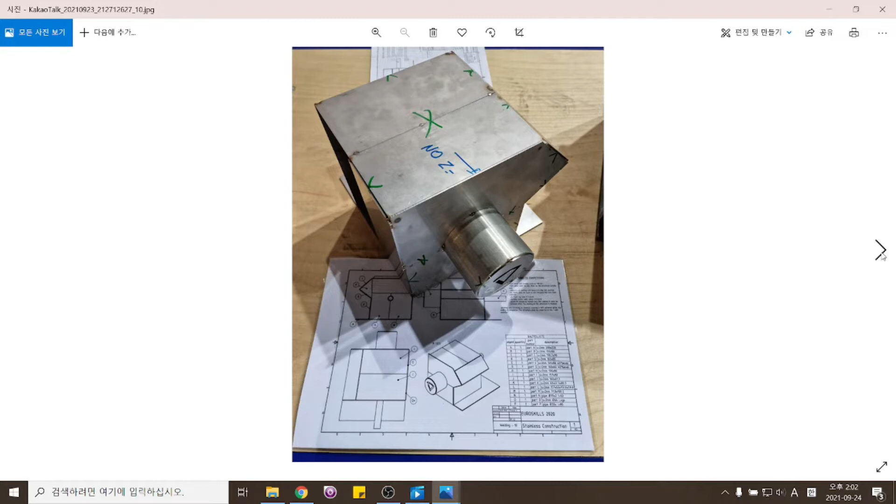This is the stainless and aluminum project we'll cover next time on October 15th. And this is the stainless and aluminum project that we will be covering on the 15th of October.

I don't know who made this problem, but it's extremely difficult and tricky. You can see that it's pretty difficult and tricky. There were two postures with 16T and 10T plates revealed.

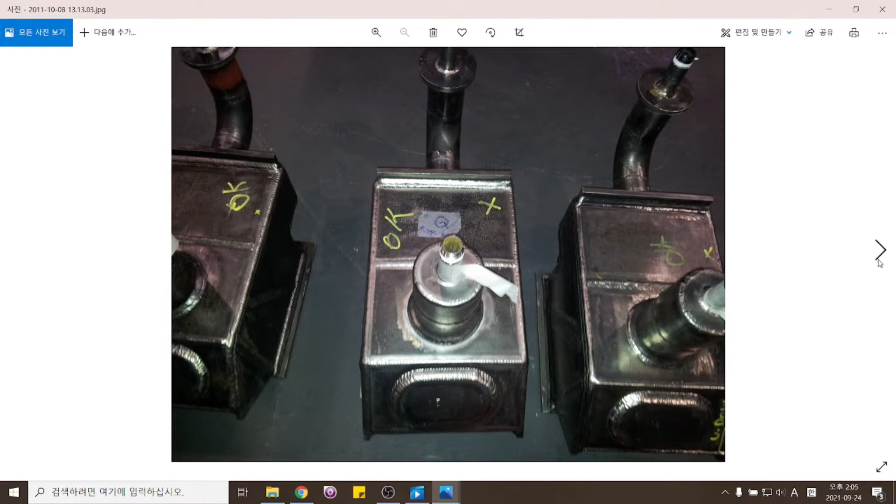Preparation of base material weld joints. Prior to checking the structure of the pressure vessel, review the provided drawing. One moment, please. Two drawings, one for the material list and another for the diagram.

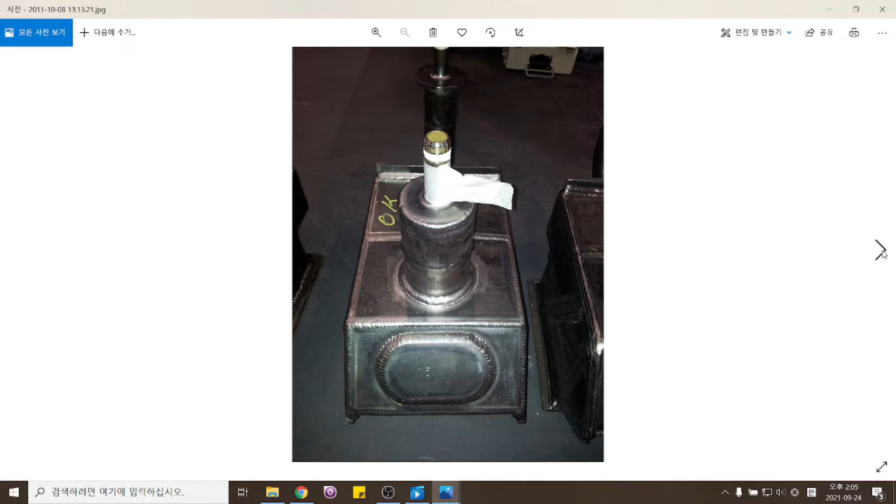You can see flux-cored welding and GMAW used here, several different methods. You can see that several methods of welding were adopted in this project, such as GMAW and flux.

After this session, everyone watching this broadcast needs to reach this level. Most of you watching this video are required to weld this well, as you can see in the picture.

This one is from competitor number 15, it says 15 here. Oh, so I believe that this is from competitor number 15.

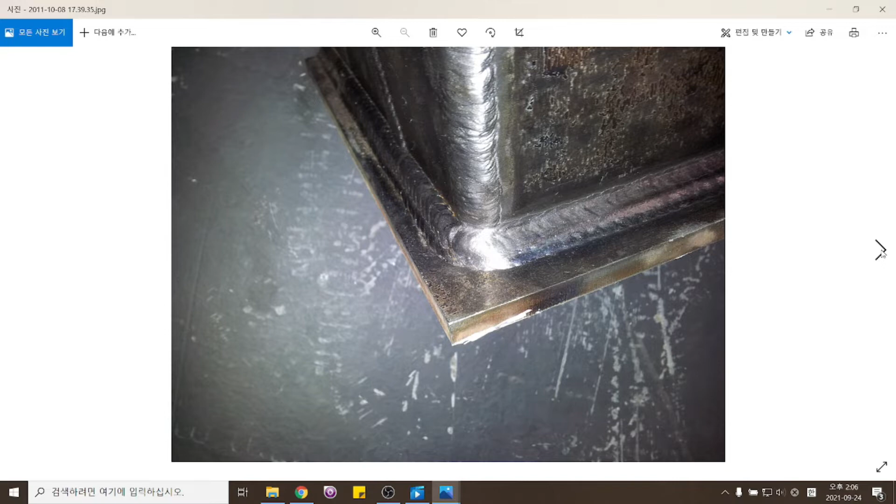When you take a partial picture like this, you can see the beads much more thoroughly. Here you can see the part where it meets the bead, the bead starting point, it's covered very smoothly. You can also see that the start point was covered by the beads very properly.

This is right after the fill pass is done. In the second session, when we discussed the plate coupon, I referred to a line called the lifeline. In this pressure vessel too, you need to keep this lifeline. This line you're seeing on the cursor is also called the lifeline, and you must keep the beads within the lifeline.

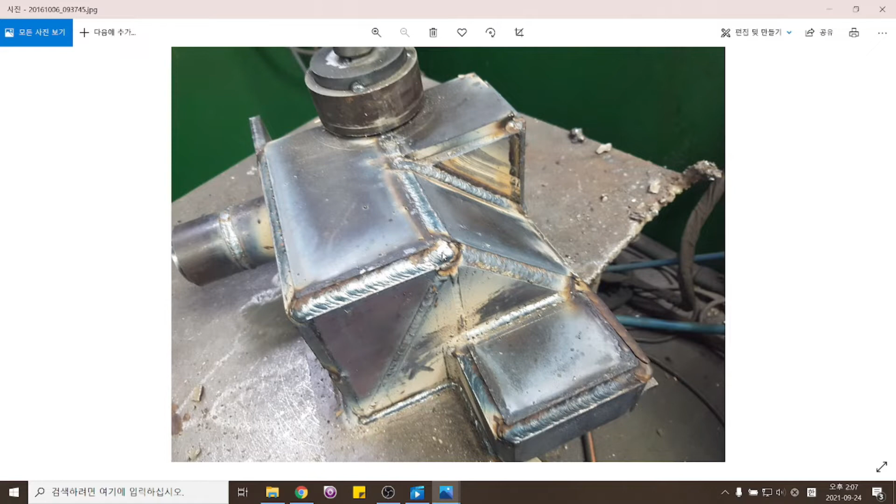You need to keep these lines so that later when you do the cap pass, you can make the beads even. Make sure that you have an even line so that after you are done with cap pass, the beads will be more beautiful. The fill pass has not exceeded the edge of this corner at all, as you can see.

This is the vessel right after every welding is done, including the cap pass. You can see that it's pretty beautiful. Magnificent.

If you take pictures from time to time after working on the fill pass, you can see where the reference point is, where the control line is drawn, and this corner area follows this edge line as the standard. You can understand exactly where to address the control line.

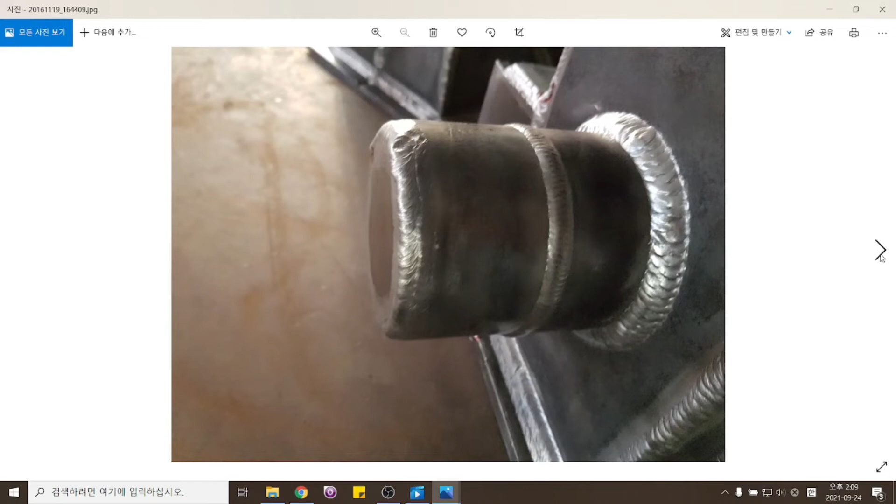This is pipe welding using GMAW, TIG welding, GTAW, and here arc welding, SMAW. So this is basically pipe welding. You can see SMAW, GTAW, TIG, and GMAW.

Pipe welding, when done well, looks very smooth because of the curvature, but if not done well, it looks very unpleasant. When it comes to pipe welding, the skill depends a lot. The appearance of the weldment depends a lot on the skills, because if you do it properly, as you can see in the picture, it'll be beautiful. If you don't do it well, then you will not have a good result.

The difficulty level of pipe welding is quite high. Pipe welding is one of the trickiest welding types.

This is also probably from Euroskills. I believe that this is also from the Euroskills. This shows the tack welding done.

As you'll see in this video, first you receive the materials, check the material list, and check the material dimensions. After you receive all the materials, make sure that all of the materials are in correct order, correct form, and correct dimensions. You also need to read and understand the diagram.

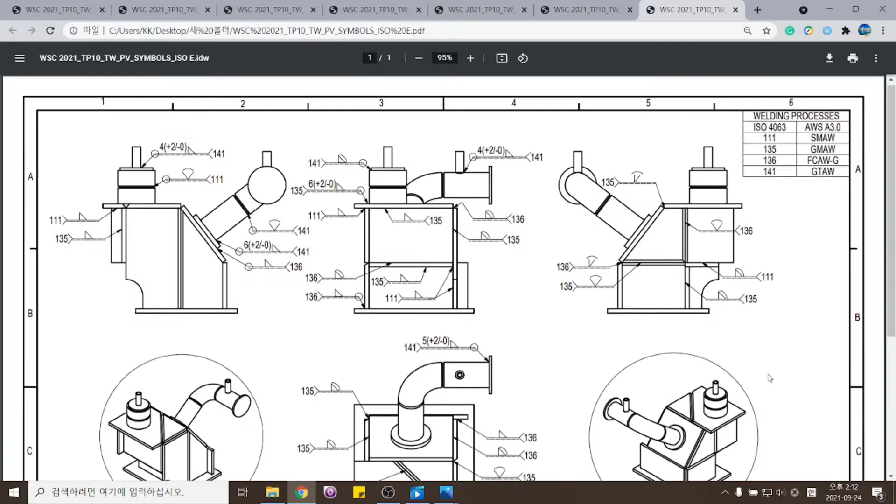So before watching the video, I think it would be good to first look at the 2021 test project diagram. Before we watch the video, let's take a look at the 2021 revealed TP.

Now if you look at the pressure vessel disclosure diagram, you can see in the diagram that there are several diagrams, but first and foremost you must look at the required material list diagram. The materials are cut out and each material has a name attached to it.

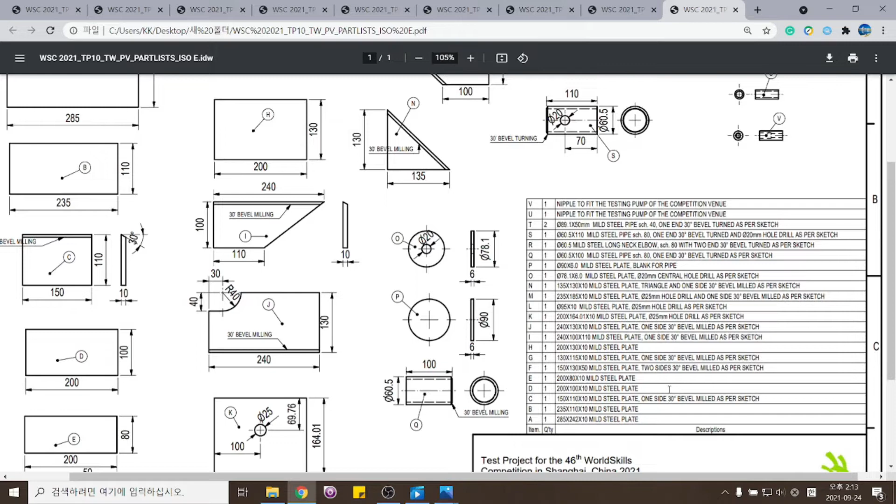So when you are training, you need to look at this material list and prepare your materials accordingly. Make sure that you have all the materials in the correct form. After that's done, you need to look at this diagram.

After you're done with that, please refer to this diagram. Looking at this diagram, the cover size is given in millimeters, the base plate size, where the pipe attaches, all dimensions are precisely shown. You can see all of the proper dimensions, such as where the pipe goes, where the plate comes out.

Looking at this, you can now proceed with the tack weld. This is the diagram that you will be referring to when you're working on the tack weld.

After the tack weld is done, you receive a tack weld inspection and a stamp, and then you need to look at this diagram. Here you can see 111 is SMAW, 135 is GMAW, 136 is FCAW, and 141 is GTAW. You can see on the top right hand side of the diagram the details in the chart.

Looking at the plan view, front view, and side view, it means to weld using 141 GTAW with a leg length of 4 and a tolerance of plus 2mm minus zero. You can see the acceptance and the tolerance in the diagram as well, such as how to weld, what to weld, and how long you should weld.

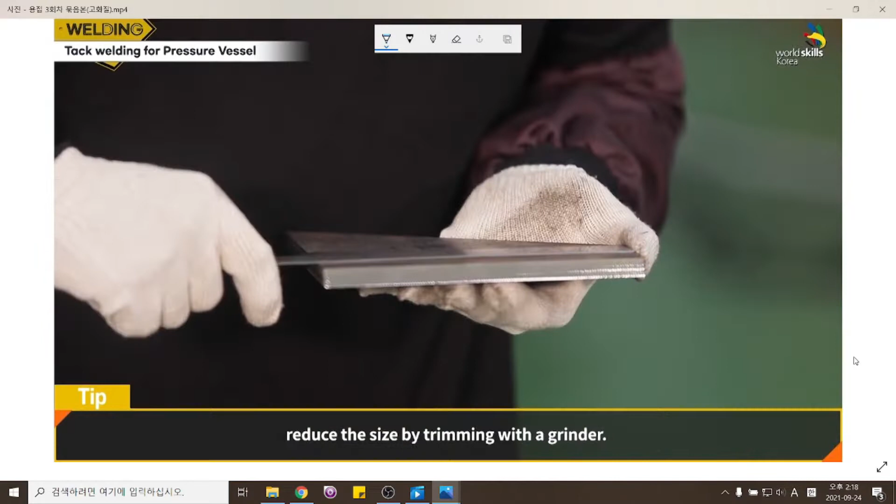After confirming the size, mark the assembly location on the pressure vessel where it belongs. A paint marker might be used for marking on the material, but it is recommended to use chalk to remove it easily.

Check the number of missing materials by marking the list symbol on the material drawing. After counting the number of parts, mark the details on the parts and the location where it should be by cross-checking with the drawing, and whether removal of the oxide layer is required.

Make sure to measure the size of pipe with vernier calipers. The thickness of pipes should be measured as well.

It is not allowed to replace the parts once tack welding starts. Prior to tack welding, check the material carefully, and if there is any material with incorrect size, ask for a new part.

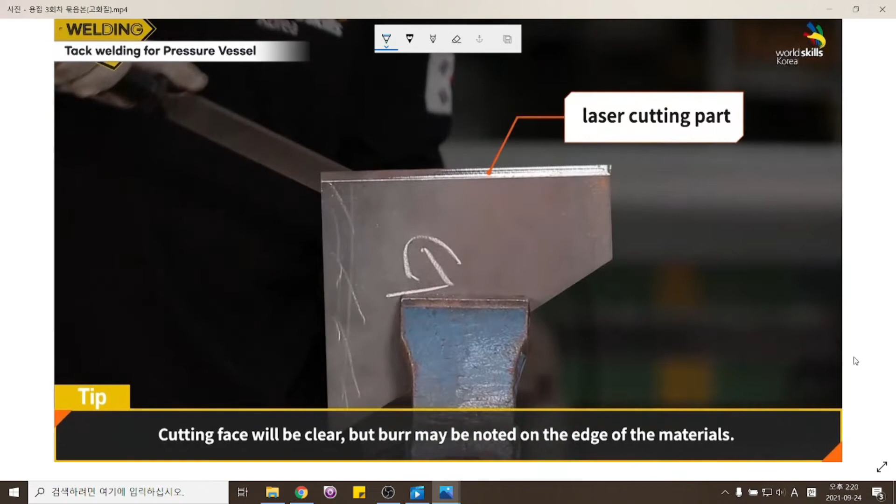After verifying the material list, remove burrs completely remaining on the edge of the material. Most of the material provided for the competition will be laser cut. Cutting face will be clear, but burr may be noted on the edge of the materials. If the residual burr is not removed, it may cause misalignment while tack welding.

Fix the material with a horizontal vise and remove the burr on the side of the plate with a file. After removal of burr, bring the material and return to the welding booth.

The workflow up to now is preparation scope and not considered as the task time duration. But pay attention carefully, more than any other process, since this is the process to check whether materials have been provided inaccurately.

Tack welding for pressure vessel. Welding process used by welder. Recommended using FCAW process for fast working and better weldability.

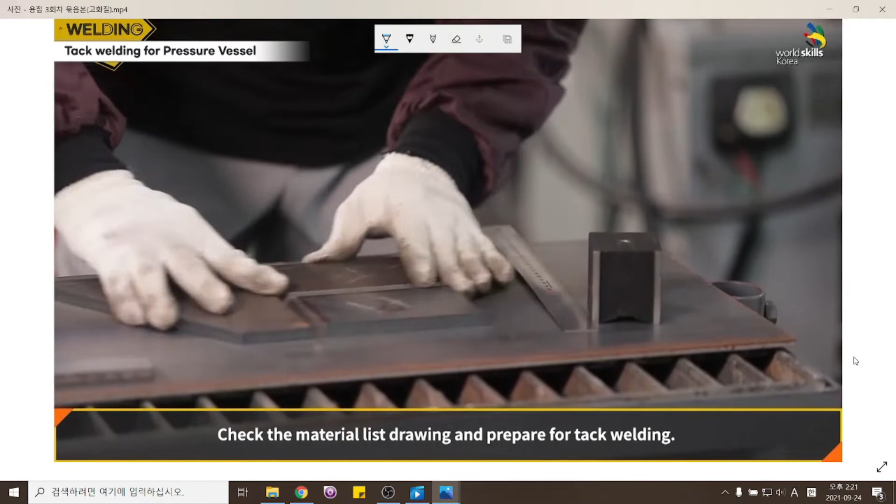For tack welding, welding tools such as steel ruler, magnetic base, hammer, and square gauge are required. Check the material list drawing and prepare for tack welding. 3 base materials will be used for the side section.

Adjust the misalignment of plates with a steel ruler and fix the plates with a magnetic base. Tack weld will be made after assembly of 2 plates, not 3 plates.

When trying to make many tack welds for many parts at one time, it will cause misalignment. Make 1 spot tack welding and continue tack welding, checking the misalignment with a steel ruler.

While tack welding, shrinkage occurs at the tack point. Remained shrinkage will cause misalignment or defects on the completed task. Flatten the shrinkage area with a hammer.

Attach the 3rd plate to use for the side section at the tacked 2 plates. When the surface of the tacked plates is not even, there may be a misalignment when placing the 3rd plate together.

Check the alignment with a steel ruler securely and fix plates with a magnetic base. For butt joint, put the plates on the table and adjust the misalignment with a magnetic base and make a tack weld.

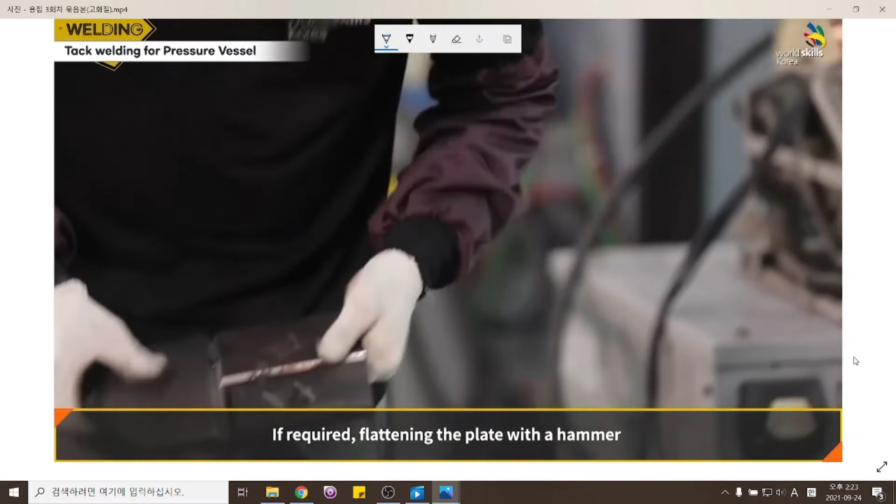Mark the location where oxide layers should be removed with chalk. When FCAW and SMAW processes are used, the oxide layer removal does not require it - the oxide layer will be dissolved at the higher welding current. For the GTAW process, due to shallow penetration and sensitivity with a contaminant, the oxide layer shall be removed in advance.

Assemble and make tacks in order of the left side section, front section, and right side section.

After the flat plate's tack welding is completed, tack weld a pad to be welded on the flat plate. First, refer to the drawing and mark the location of the pad. When dimensions for location of pad are incorrect, it's considered incorrect work and a competitor will lose marks.

In case of the pad, it should maintain 0 gap between the flat plates. If tack welds are produced incorrectly, the main welding will be very challenging. When corner joints have gaps or overlap, welding cannot be done with equal welding conditions because welding parameters need to be changed a little bit.

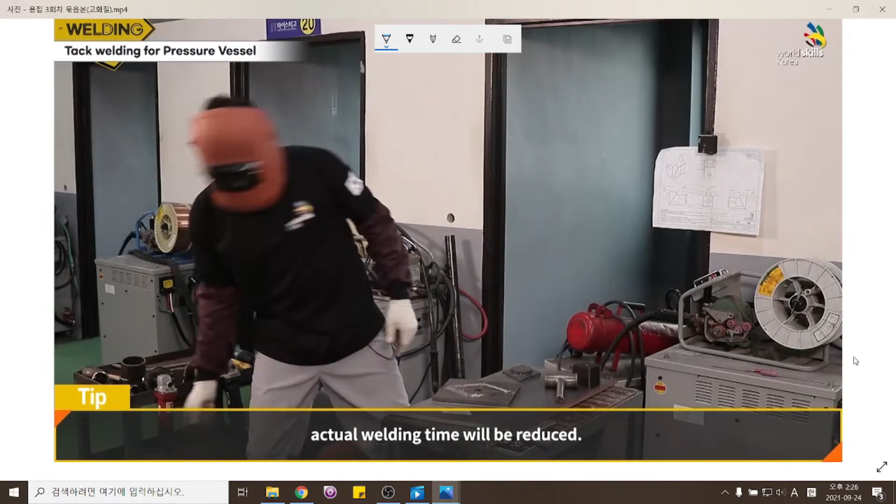Attach the pad to the flat plate with FCAW. Make tack welds at the location where the tack could be removed easily by the grinder. Since retack welding might be required if incorrect tacks are made, the pad needs to be dismantled from the flat plate.

Then, tack welding for pipes. Fix the pipes by using a V-groove block and magnetic base. Then, make tack welds. By using the V-groove block, adjustment of misalignment will be easier since the position for pipes will be fixed. A V-groove block prevents the movement of pipes and adjusts the misalignment with a magnetic base.

Make 2 or 3 tacks for pipes. If too many tacks are made on pipes, it will be hard to separate pipes when tacks are made incorrectly. When performing tack welding, it is necessary to consider the failure of tack welding and reworks.

Make tacks on pipe cover plates. To keep the gap between the pipe and cover plate, insert a steel ruler and weld tacks. The thickness of the steel ruler used by the welder is about 0.8 millimeters. After completion of tack welding from one side, remove the steel ruler and weld tack from the opposite side.

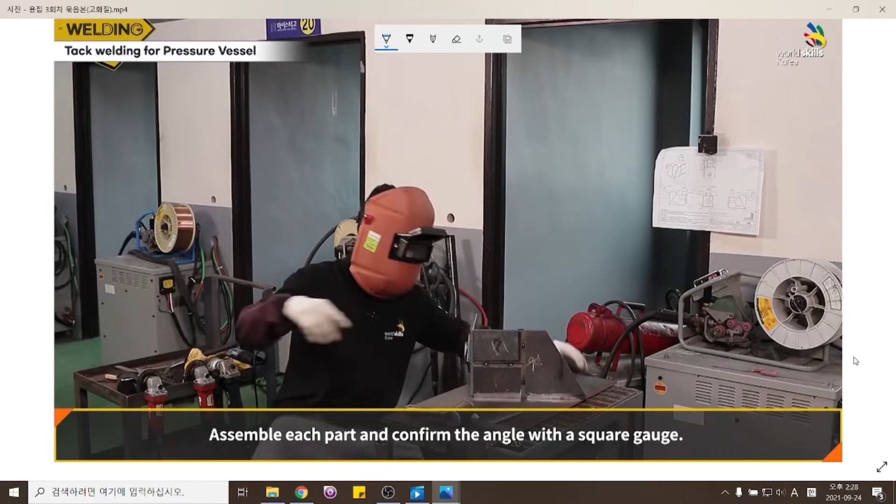If plates maintain even level while tack welding, the gap of the corner joint will be uniform at bottom, middle, and top. Maintaining even level is the most critical point. If plates are not even, pre-assembly might not be possible.

Once you confirm the square angle, then make tack welds. Size of tack welds shall not be bigger than the required weld size. When side section assembly is completed, install a cover plate and make tack welds.

When tack welding a pressure vessel, consider the following assembly sequence. Otherwise, it will be impossible to assemble, or a wide gap can be created when the next parts are assembled. When securing large material, use a G-clamp to fix the plates. Even if plates have been fixed, double-check if the square angle and correct alignment are maintained. Make tack welds on the cover plate.

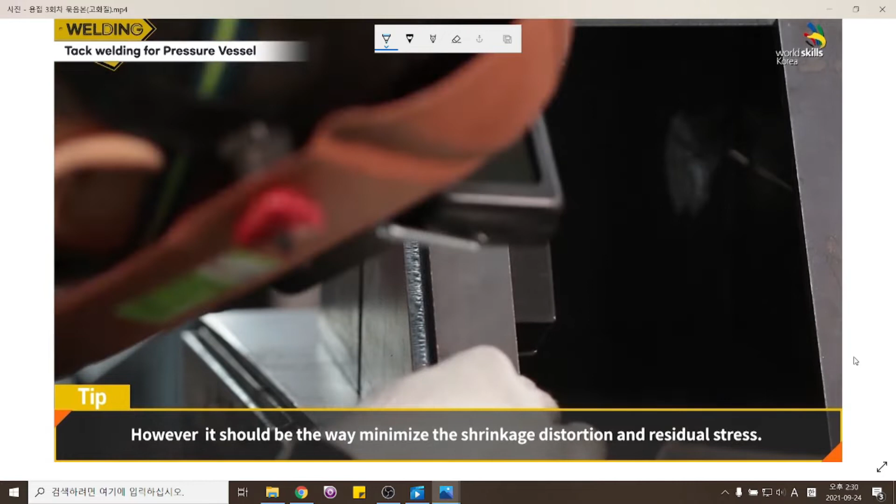Assembly sequence for the pressure vessel is not determined. However, it should be done in a way that minimizes shrinkage distortion and residual stress. Therefore, it is recommended to assemble from left to right side from the plate. In general, weld butt joints having larger shrinkage first. Then, weld the fillet joints. After tack welding, check repeatedly to confirm the alignment.

Assemble and tack weld the cover plate on pipes. Refer to the drawing and locate the pipe correctly. If pipes are installed at an incorrect location, it will be considered incorrect work, and a competitor will lose marks.

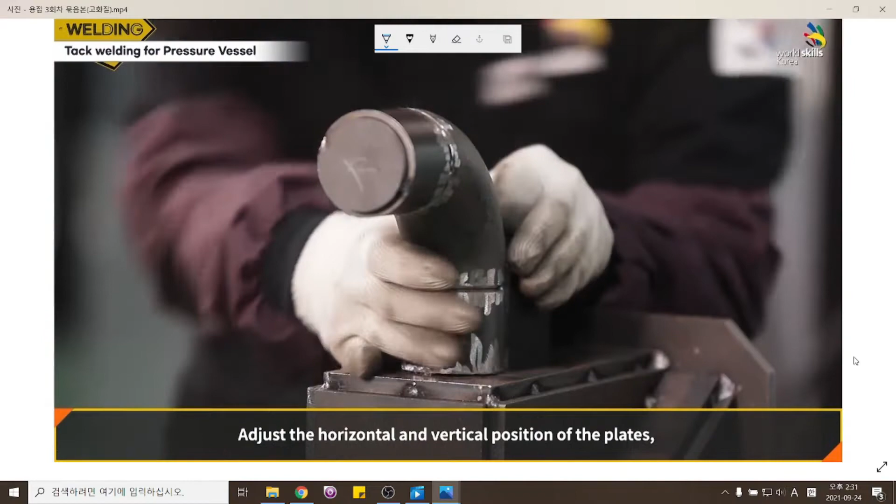Make tack welds for the elbow-shaped pipe. Adjust the horizontal and vertical position of the plates and fix them with a magnetic base, then make tack welds. Make 2 tack welds on the location where tacks could be removed easily by grinding. After tack welding, confirm the pipe is kept vertical without any twist. If required, remove the tack and do rework.

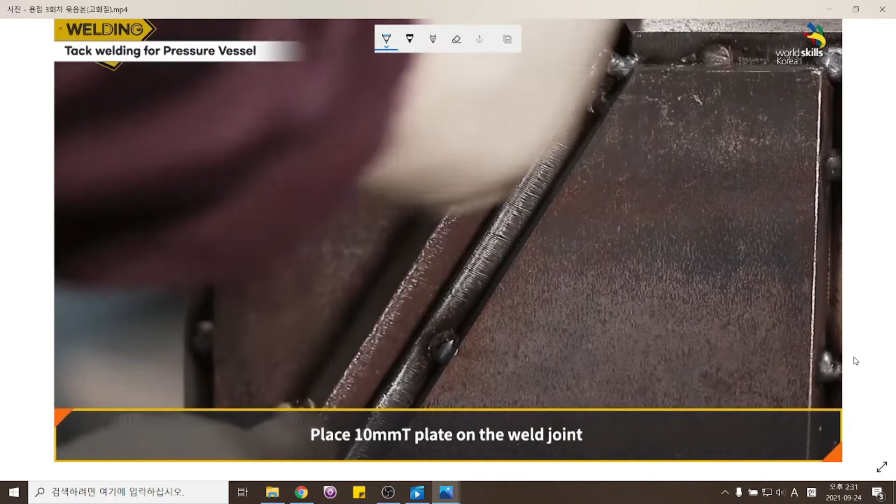When the tack welding is completed, mark the welding guide line that is convenient for the welder for the butt and fillet joint. Place a 10 mm plate on the weld joint and make the weld guide line with a marking needle. Mark the welding guide line for the pipe joint after checking the min and max size of the welding width according to the drawing.

Inspect the pressure vessel tack welding done according to given instructions. If there are incorrect parts, remove the tacks with the grinder and do rework. Check the length of tack welds are less than 15 millimeters.

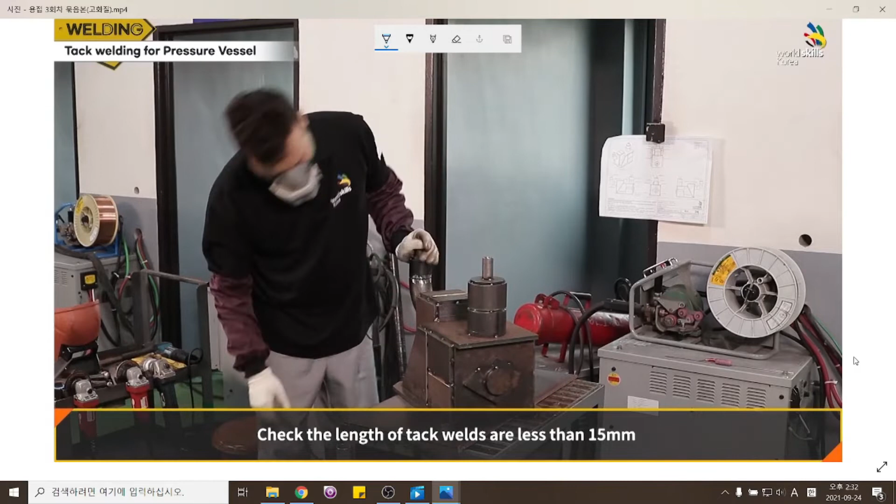Preparation for root pass welding. Write the type of welding process to be used for each joint after reviewing the drawing.

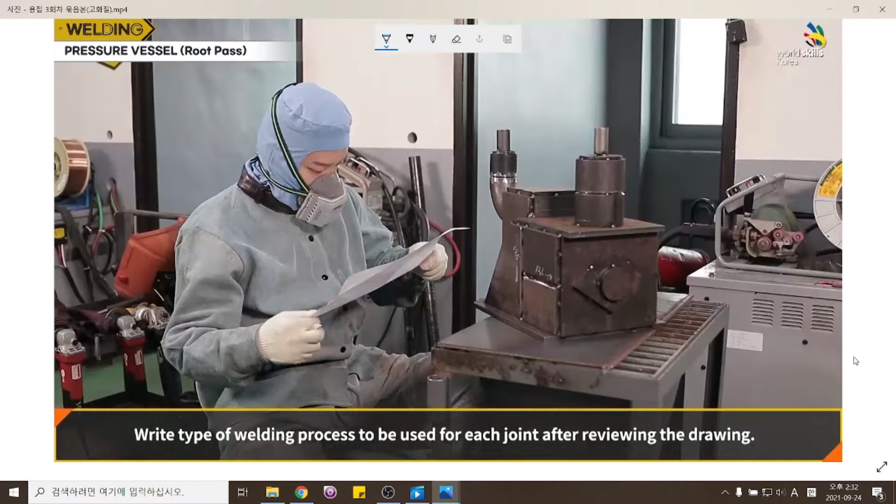For pressure vessel welding, four welding processes are used: FCAW, GMAW, GTAW, and SMAW. According to ISO standard, a dedicated number is given for each welding process: 111 is SMAW, 135 is GMAW, 141 is GTAW, and 136 is FCAW.

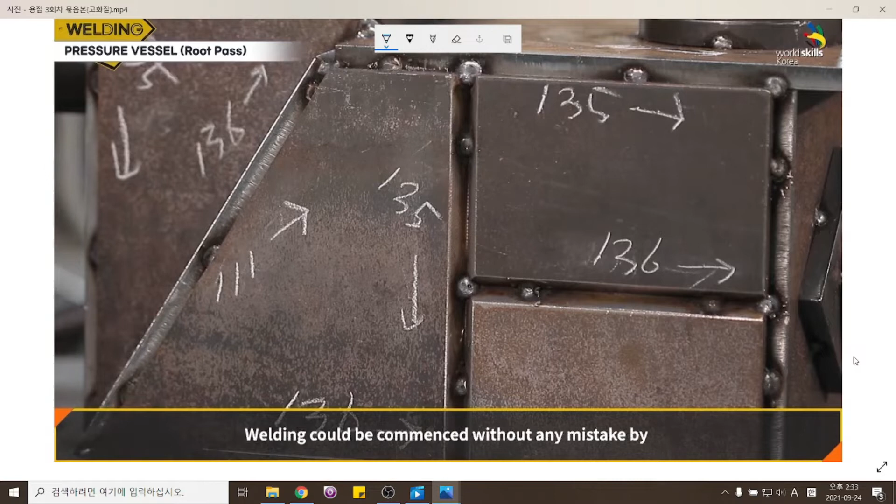When a different welding process than the one specified on the drawing is applied for pressure vessel joints, the joint will not be accepted. Welding could be commenced without any mistake by writing down the required welding process in advance to avoid errors.

Butt joint welding. For root pass welding, welding sequence is very important. Generally, weld the butt joint first, followed by the corner joint, then weld the fillet joint last.

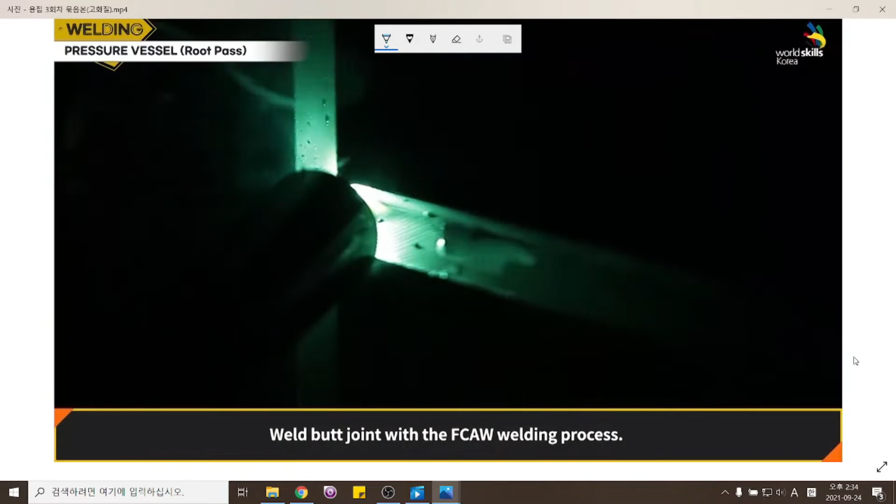Weld the butt joint with the FCAW welding process, using the backhand technique. When root welding with FCAW, fill up a large amount of weldment at once. Grind off the excessive tack welds which may become an obstacle because of the fast welding speed.

When welding root pass with FCAW, the start point is important. Set the size of welds considering the amount of weldment and make uniform weldment from the start point to the end point.

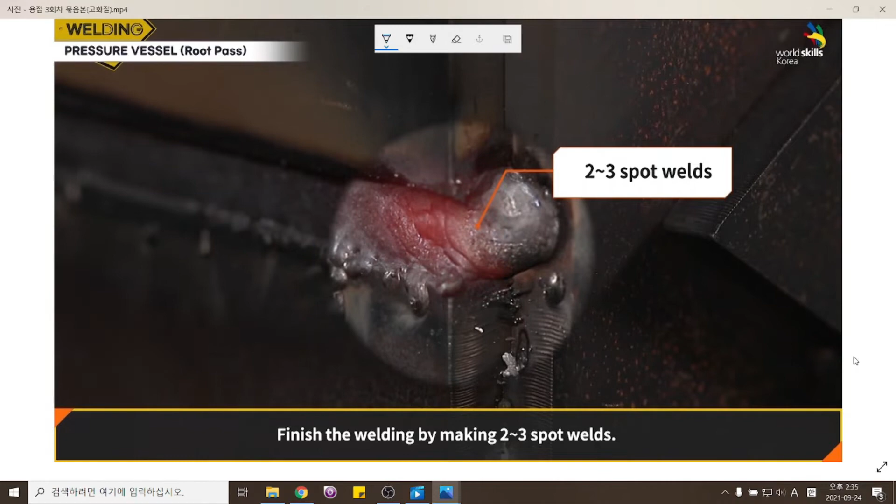Finish the welding by making two or three spot welds. Remove slag by grinding and clean up contaminants with a cup brush.

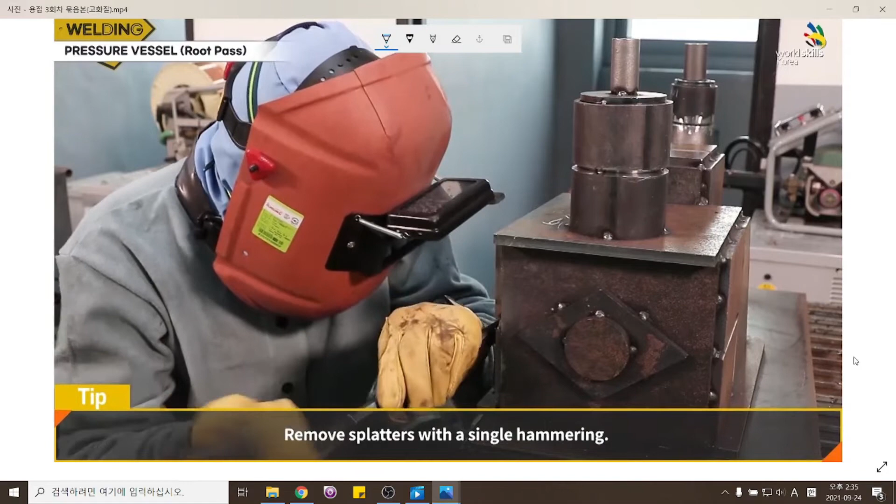Remove spatters on the weld area with a chisel and hammer, using a single hammering motion. Be careful, as hammering several times may cause notch indentation on the pressure vessel.

This is a vertical butt joint. Weld the joint with the GMAW 135 process from the bottom to the top. Prior to welding, grind off the tack welds, which may create an obstacle.

The root pass of a pressure vessel shall withstand the hydro-pressure test. The weld joint needs to be filled up with weldment securely to prevent any leaks. Weave in a semicircular or zigzag pattern and fill up the weldment completely by pausing at each edge.

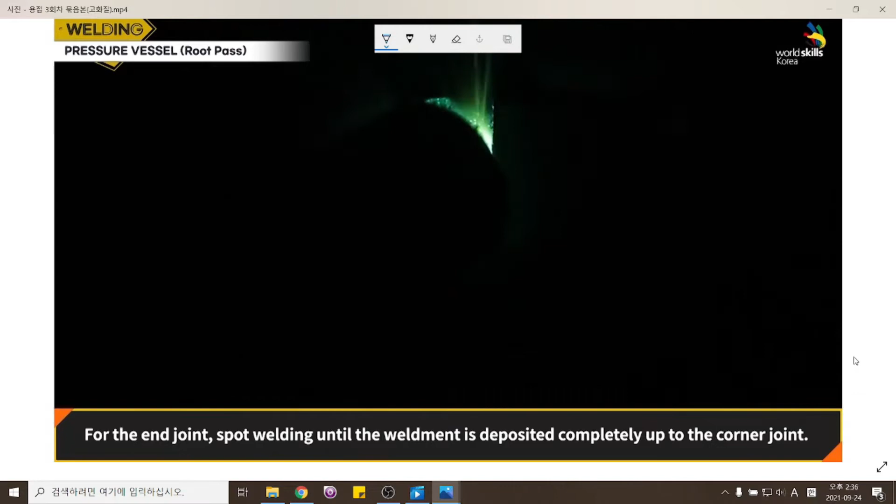For the end joint, spot weld until the weldment is deposited completely up to the corner joint. Consider it as filling the gap between two plates by welding.

Corner joint welding. Weld the corner joint with the SMAW 111 process.

Use welding electrode KH500LF, 4.0 millimeters, with a welding current of about 135 amperes.

Strike an arc at the starting point and align the weld with the tip of the corner line, then start weaving once the arc is stabilized.

In general, triangle weaving, making a triangle shape, is mainly used. Triangle weaving is the way to move forward and backward repeatedly, like drawing a triangle shape.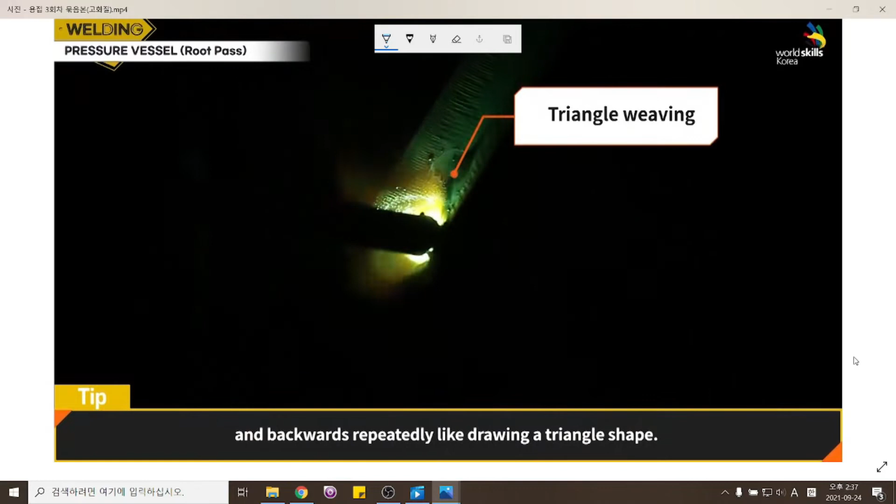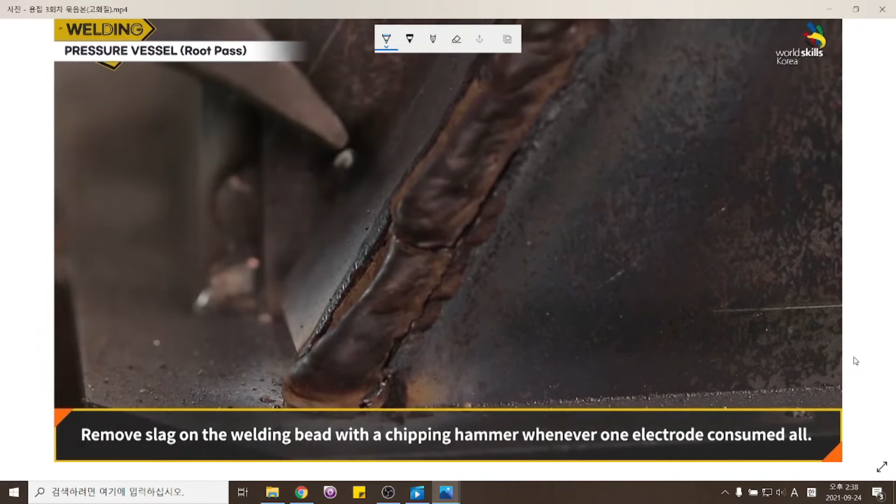Due to the limited length of the welding electrode, stop-start cannot be avoided. About 80 to 100 millimeters of weld can be made with one electrode. Remove slag on the welding bead with a chipping hammer whenever one electrode is fully consumed.

For a stop-start of the SMAW process, strike an arc in front of the weld, then bring it back to the weld making a U shape, and connect the weld once the arc has stabilized. This method prevents excessive reinforcement or overlap.

To complete the task, the proper time should be assigned for each stage.

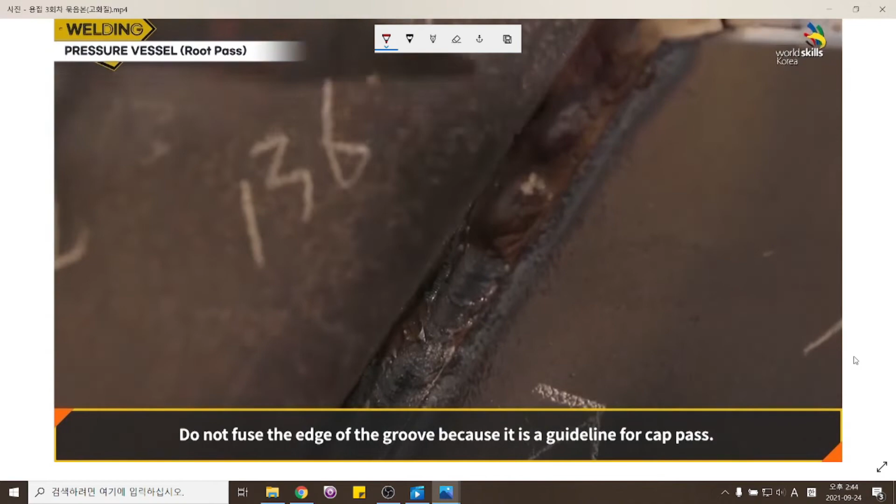While weaving, do not reach the groove edge by any means. Do not fuse the edge of the groove because it is a guideline for the cap pass. After completion of welding, remove slag on the bead completely.

This is horizontal corner joint welding. Weld the root pass with the SMAW 111 process. If the joint is too protruding, it is better to grind it with a grinder to remove the welding obstruction.

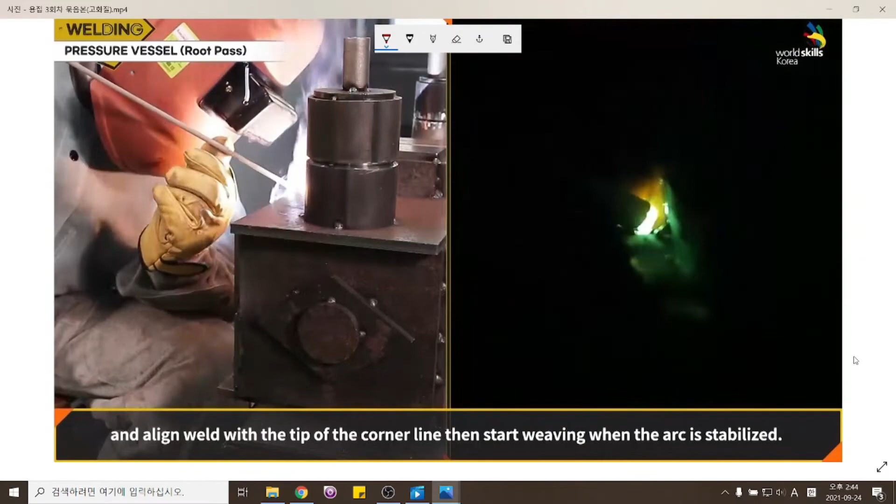Strike an arc at the starting point and align the weld with the tip of the corner line. Then start weaving when the arc is stabilized. Deposit the weldment up to the corner edge and progress with the triangle weaving technique.

For the SMAW process, make a keyhole small enough to prevent burn-through in front of the weld and progress welding. Weave the welding rod slowly while staying on both sides of the corner, little by little. Remove slag on the welding bead when one electrode has consumed all the weldment generated.

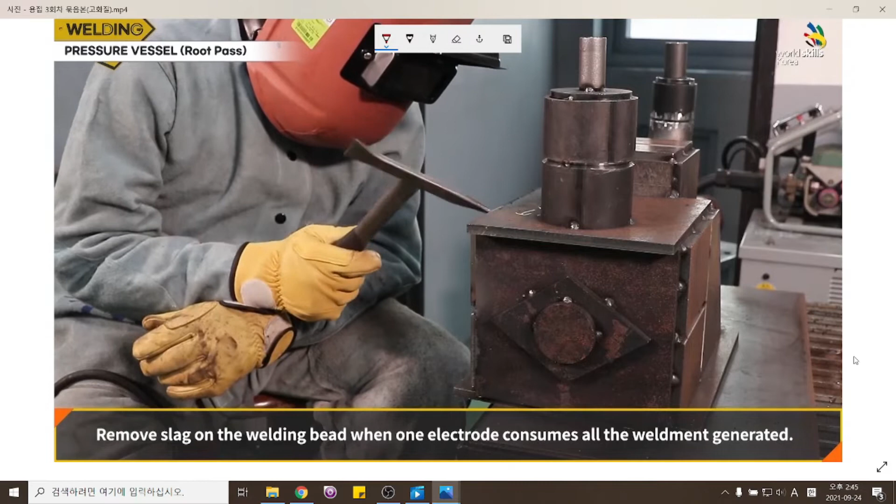Start welding with a new electrode and make the bead connection. For a stop-start, strike the arc in front of the welds, then bring it back to the welds making a U shape and connect welds when the arc has stabilized.

Weave carefully in order to avoid slag inclusion or weld defects. Allow the weldment to be deposited up to the edge of the corner joint, then finish welding.

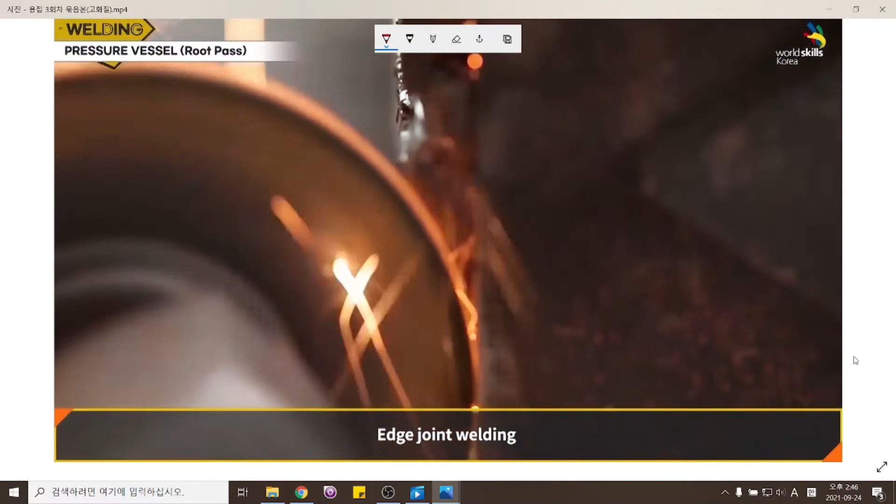Edge joint welding. Weld the edge joint of the vertical corner area. Weld the joint with the GMAW 135 process.

Grind off the excessive tacks prior to welding. The oxide layer needs to be removed before welding since GMAW produces shallow penetration and is a sensitive welding process. After grinding, clean up contaminants with a cup brush.

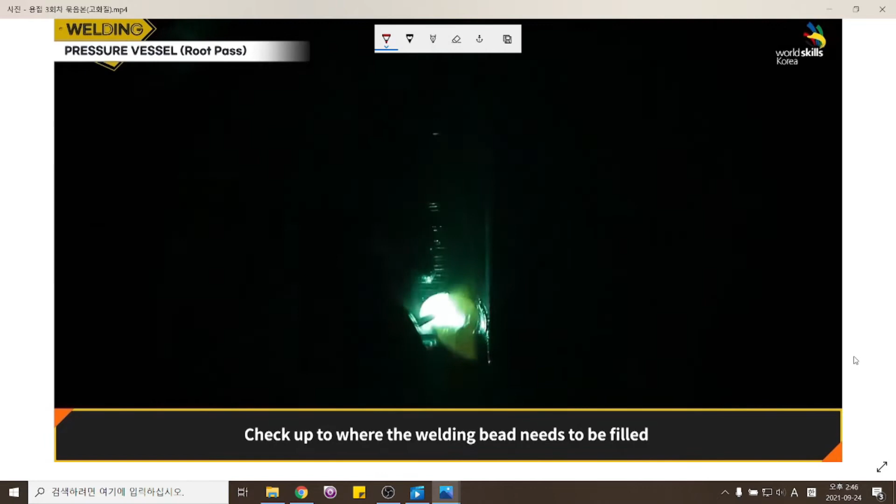Check up to where the welding bead needs to be filled and make the weld line by weaving the torch side to side at the start point. The weave should be in a semicircle or zigzag pattern. The tip of the wire should pause at each edge and deposit the weldment.

Maintain a 3 to 4 millimeter weaving pitch while welding. While weaving, do not let the edge of the corner get melted. The edge of the surface is a guideline for the cap pass. The most important thing is to maintain the bead line on both edges.

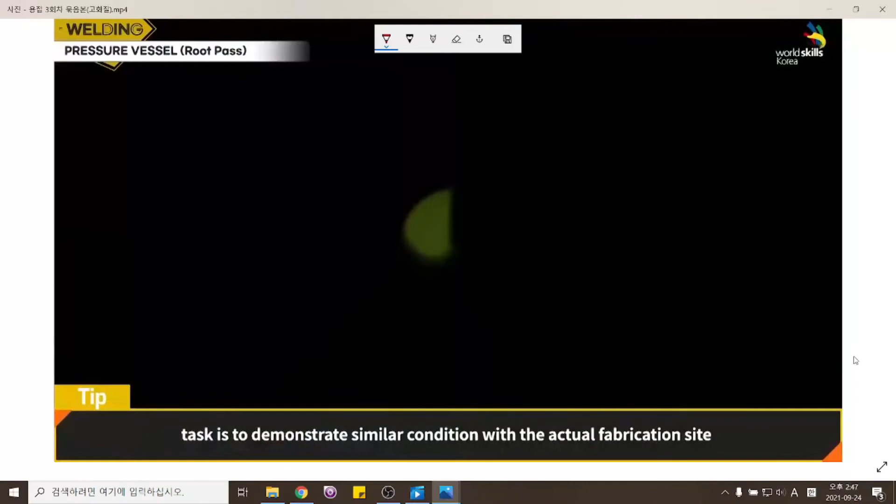The reason different welding processes are applied for the pressure vessel task is to demonstrate conditions similar to an actual fabrication site. Deposit beads fully up to 1 to 2 millimeters lower than the surface, and deposit beads at the end point fully as well.

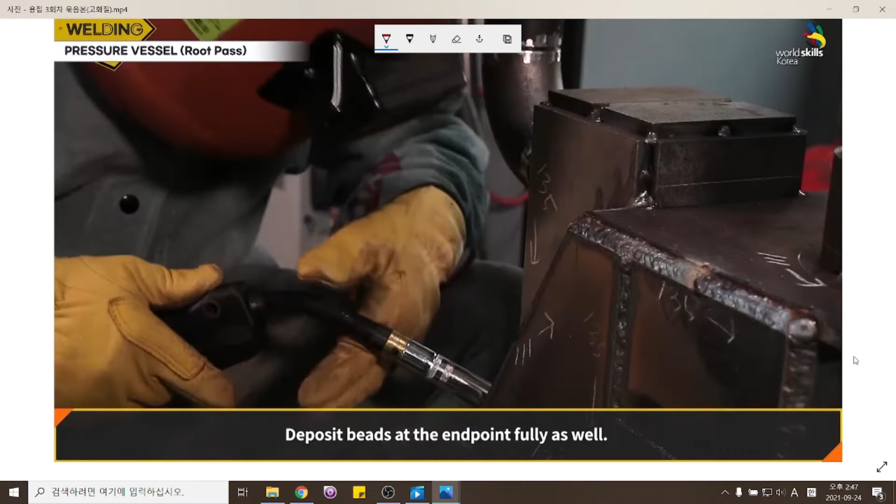It is an inclined vertical fillet joint. Weld the joint with the FCAW 136 process. It is not recommended to deposit a large amount of bead with FCAW for the fillet root pass. A stable cap pass is possible when a thin root pass has been made with FCAW, because its travel speed is fast and its welding current is high.

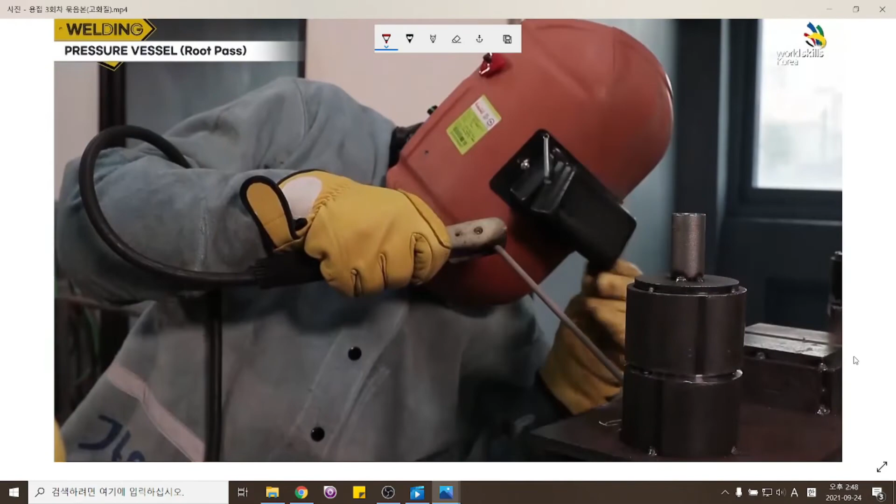Pipe welding. Weld the joint with the SMAW 111 process among the 4 welding processes. Weld from the 3 or 9 o'clock position to the 6 or 12 o'clock position clockwise, based on the front view drawing.

Making round welding along with the pipe curve is important for pipe welding. Keep bead height to a minimum and deposit uniformly.

Weld the cover plate of pipes with the GTAW 141 process. This section is about mild steel welding. Be careful that the edges of the groove do not melt, and weld along with the pipe radius while maintaining a short arc length.

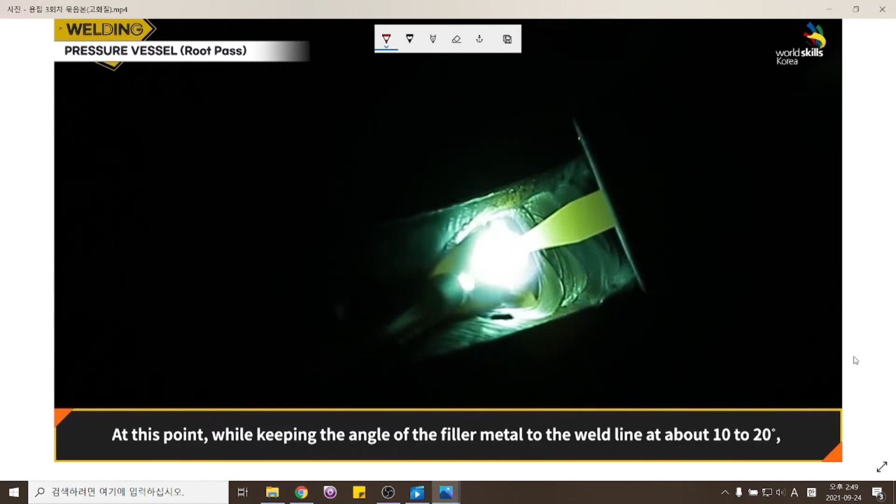At this point, while keeping the angle of the filler metal to the weld line at about 10 to 20 degrees, make the weld by pushing to the front towards the torch where the arc occurs. Put the nozzle on the V-groove and travel by moving the torch in a half moon or zigzag pattern for weaving.

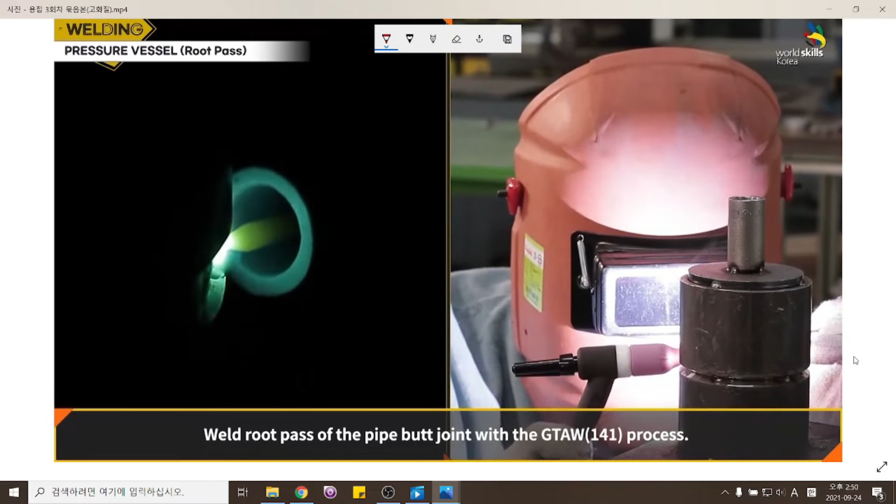Weld the root pass of the pipe butt joint with the GTAW 141 process. Pipe to pipe connection is called a pipe butt joint. The weaving technique for the connection part between the cap plate and the pipe is slightly different.

Welding for the pipe butt joint proceeds very quickly by weaving the ceramic nozzle of the torch at the top of the groove, whereas a zigzag pattern weaving is applied for cap plate welding. Be careful that the groove edge of the pipe joint is not melted, and deposit welds by feeding filler metal uniformly to make an even bead height.

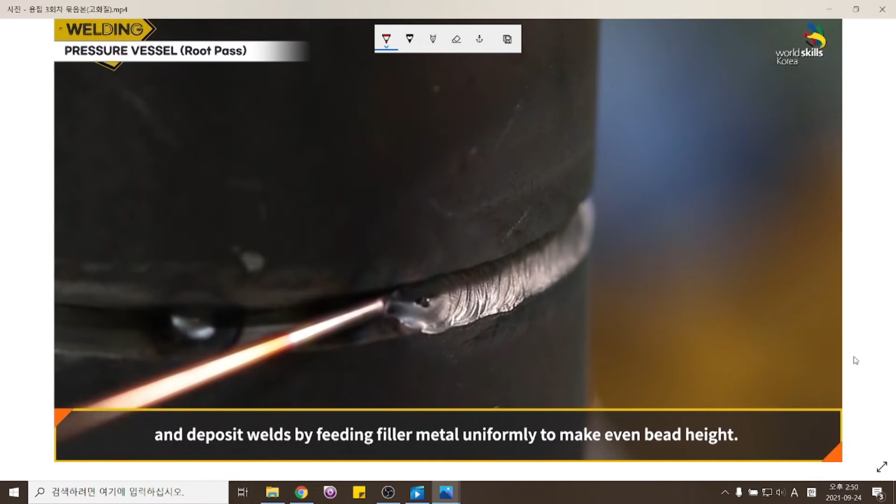Checking the condition of welds. After completion of root pass welding, check the condition of the welds. Check whether the edge of the vessel has been welded.

If the edge of the weld joint melts and disappears, the cap pass welding becomes difficult because the welding guideline cannot be confirmed. Cross-check the actual work against the drawings and confirm if the weld joint was made with the welding process indicated on the drawings. If a different welding process is applied against the drawing, the joint will not be accepted.

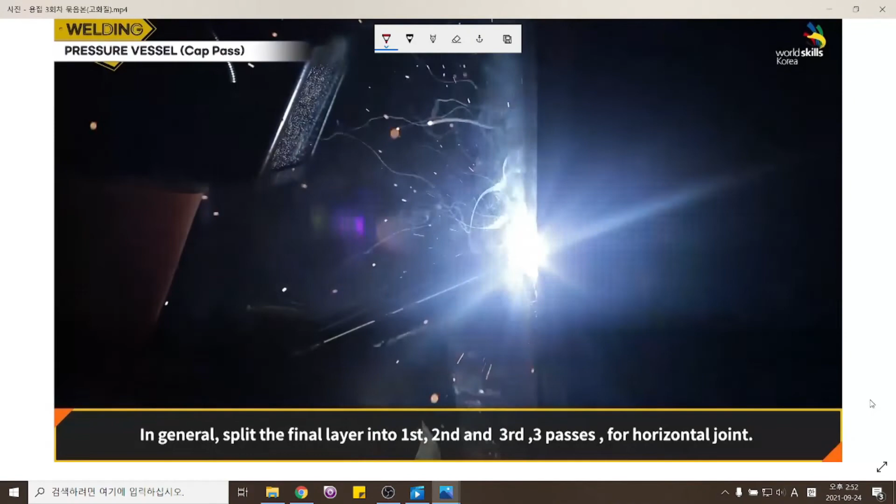Butt joint welding. Horizontal butt joint welding: weld the first cap pass with the FCAW process 136. The cap pass of horizontal welding is usually stacked 3 times in total, as first, second, and third. For the first cap pass, weld straight, aligned with the bottom groove edge.

When the first cap pass welding is completed, remove slag with a chipping hammer. Grind off the upper part of the first cap pass and keep the line straight.

Second cap pass of the FCAW butt joint welding. For the second cap pass, weld by covering 1/2 or 1/3 of the first cap pass.

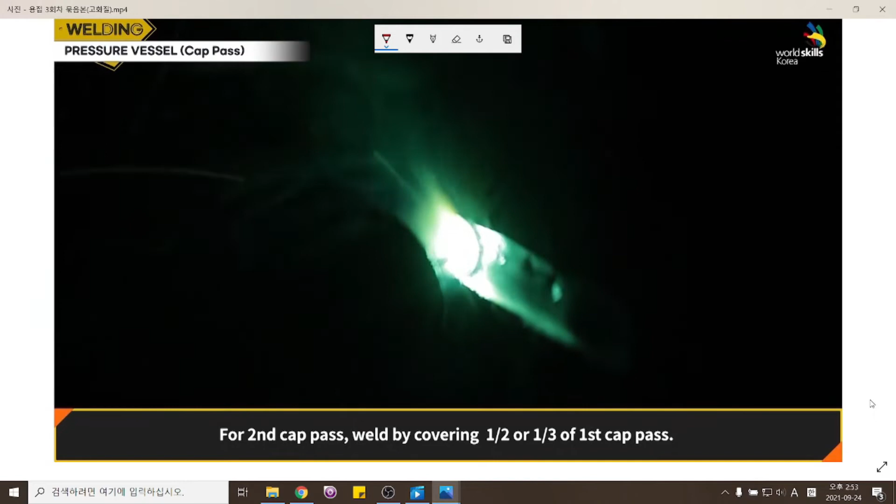In horizontal welding, weaving is not possible because the welding material flows down. Therefore, in order to make a sufficient bead width on the groove surface, it is necessary to stack the cap pass 3 times. When the second cap pass welding is completed, remove slag with a chipping hammer. Grind off the upper part of the second cap pass and keep the line straight.

The third cap pass is the last. Weld by covering 1/2 or 1/3 of the second cap pass.

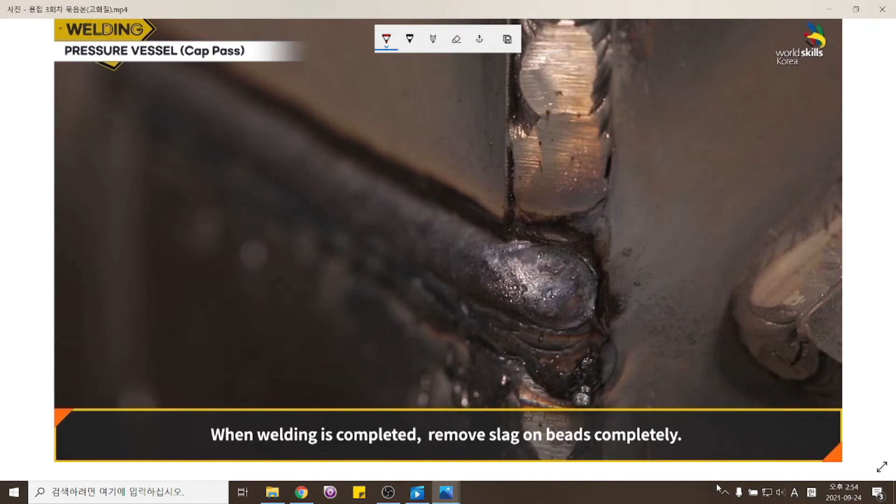In horizontal welding, the flow of the melt may differ depending on the angle of the welding rod, so pay attention to the angle of progress. When welding is completed, remove slag on the beads completely. When the groove width is wider than this joint, the weld joint shall be deposited with more welding passes.

Vertical butt joint welding: weld with the GTAW process 141. Remove excessive beads generated during the horizontal welding with a grinder. Vertical welding shall be started from the bottom and proceed to the top.

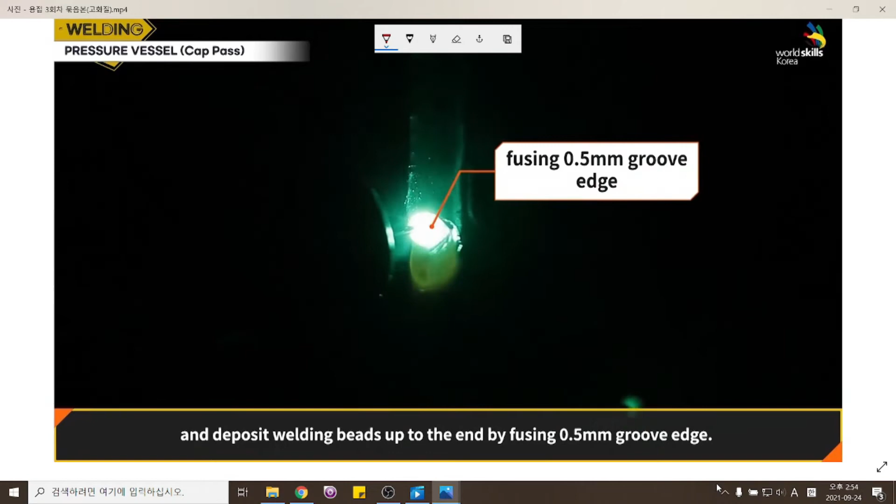Check the bead width that needs to be filled at the first point of view. When the bead width is confirmed, start weaving. Weave in a semicircle or zigzag pattern and deposit welding beads up to the end by fusing 0.5 mm of the groove edge.

Avoid incomplete penetration, undercut, and overlap while fusing the groove edge. Welding defects could be generated when travel speed is too fast, contaminants are present, or there is a problem with the equipment, since the GTAW process is extremely sensitive.

From 5 millimeters ahead of the endpoint, keep the arc length short and make 2 or 3 spot welds.

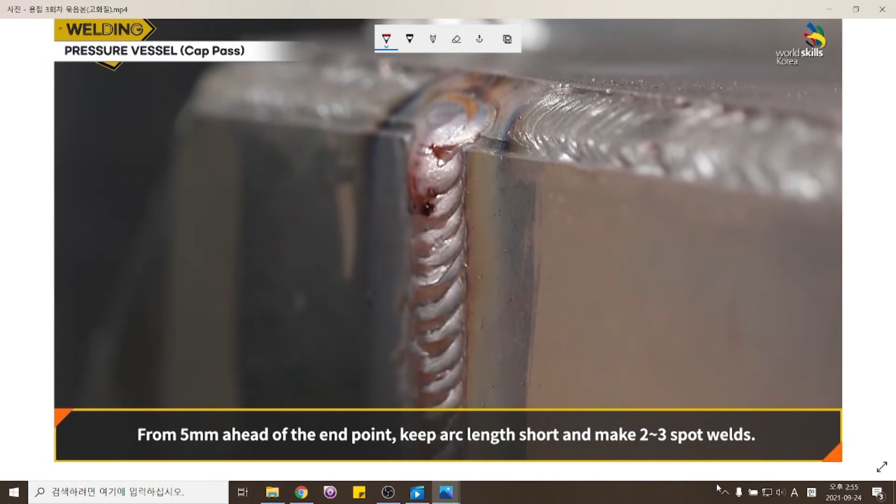Corner joint welding. Inclined vertical joint welding, welded with number 111 SMAW process, using a 3.2 millimeter electrode and setting welding current at 110 ampere.

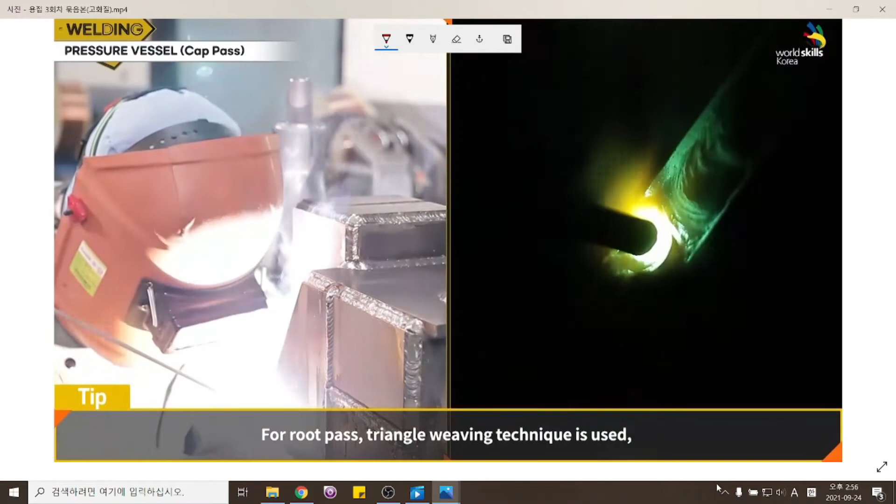Strike an arc at the bottom part and start weaving when the arc is stabilized. For root pass, a triangle weaving technique is used, but for cap pass, a side-by-side weaving technique is used. Pay extra attention to prevent any defects for cap pass, which affects the welding profile. Weave the arc from one groove edge to the other by keeping the short arc length.

Due to the limited length of the welding electrode for SMAW, stop-starts cannot be avoided. About 80 to 100 millimeters of weld length can be made with one electrode. Remove slag on the welding bead with a chipping hammer whenever one electrode is all consumed.

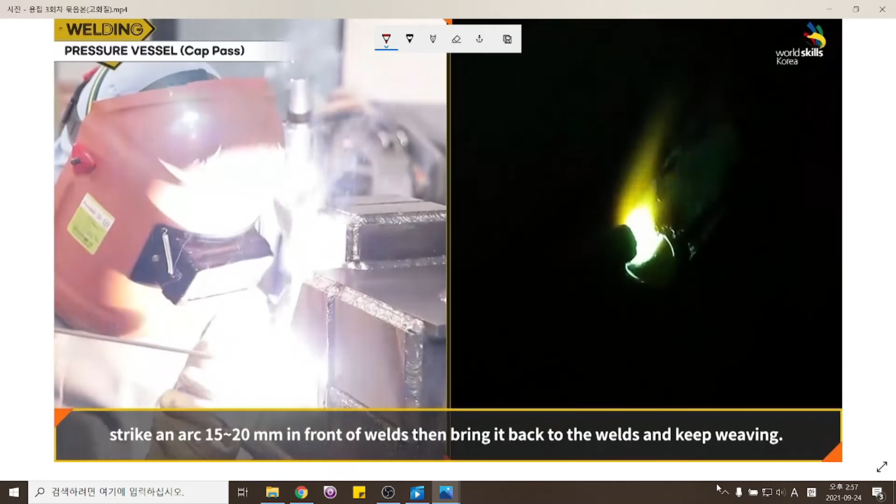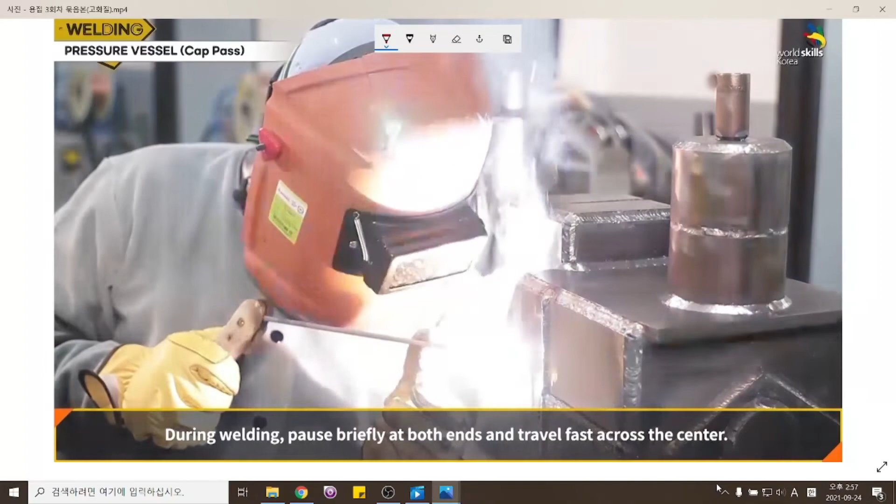For welding stop-starts on cap pass, strike an arc 15 to 20 millimeters in front of the weld, then bring it back to the weld and keep weaving. Keep the short arc length to prevent any welding defects. During welding, pause briefly at both ends and travel fast across the center. If the electrode pauses too long in the center, overlap may occur.

Stop welding and remove slag on the welding bead with a chipping hammer whenever one electrode is all consumed. For a stop-start of the SMAW process, strike an arc in front of the weld, then bring it back to the weld making a U shape and connect the weld when the arc has stabilized. The bead connection of stop-starts on cap pass should be invisible. Pay attention to prevent excessive face reinforcement such as overlap.

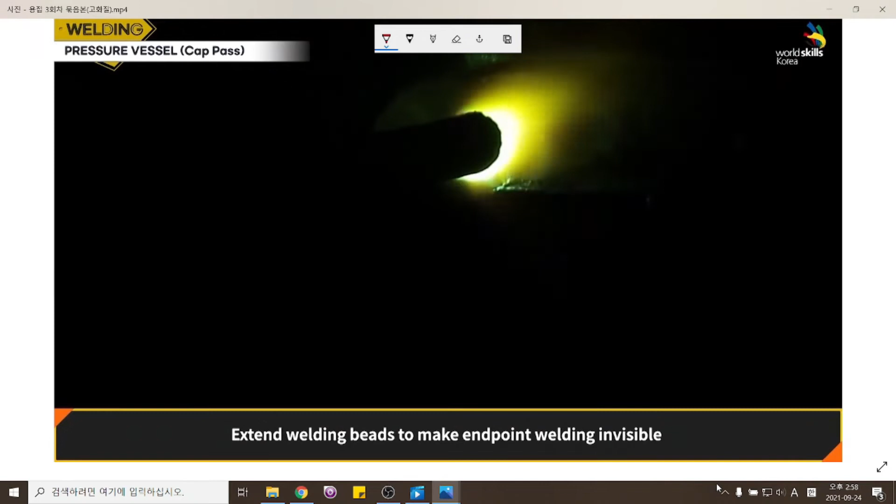Extend welding beads to make the endpoint of welding invisible and to be covered by the corner joint welding. Remove slag on the weld with a chipping hammer.

Horizontal corner joint welding. Grind off the excessive reinforcement and uneven beads. After grinding works, clean up contaminants with a cup brush.

Weld horizontal corner joint with number 111 SMAW process. For the first cap pass, weld straight, aligned with the groove edge. Keep a 95 to 110 degree electrode working angle and weld with a stringer bead without weaving, making round shape beads.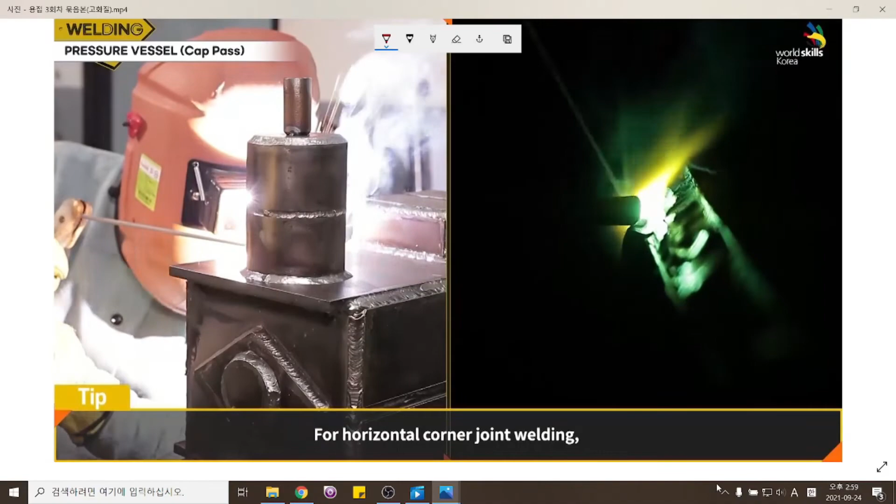When joint welding the horizontal corner, there is a part where the vertical butt welded bead meets. This part is difficult to make a straight bead, so you have to pass it a little slowly and weld it. When the first cap pass welding is completed, remove slag with a chipping hammer.

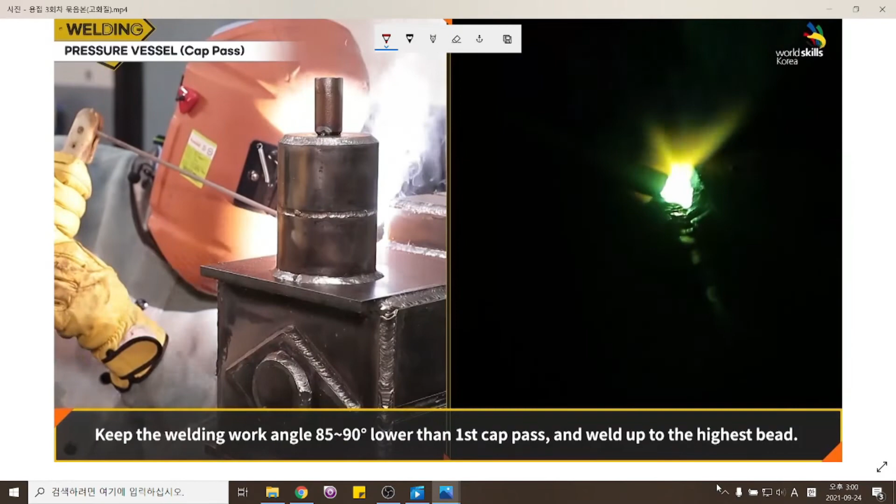The horizontal corner joint welding continues with a second cap pass welding. Keep the welding work angle at 85 to 90 degrees, lower than the first cap pass, and weld up to the highest bead.

For the second cap pass, weld by covering 1/2 or 1/3 of the first cap pass and up to 1 millimeter ahead from the upper groove edge. Be careful not to melt the line above the improvement surface as it becomes the baseline of the last, third cap pass. For second cap pass welding, weld with a stringer bead without weaving, making round-shaped beads.

Grind off the excessive reinforcement and uneven beads.

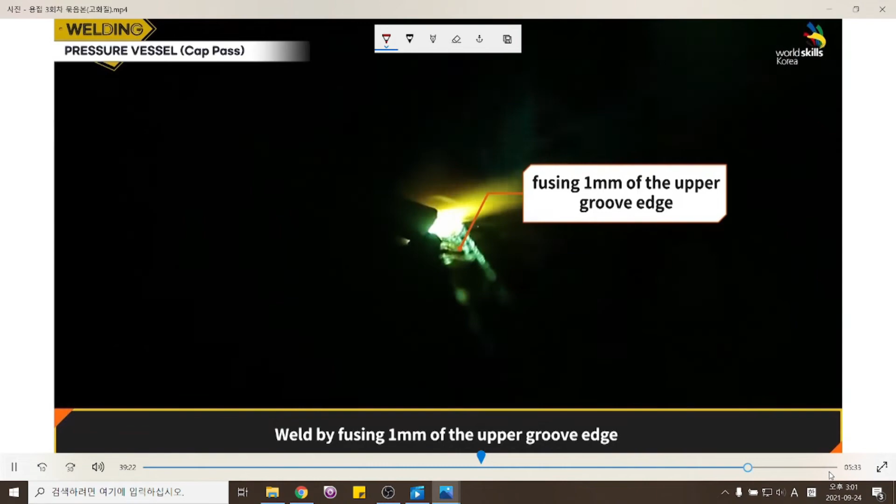This is the third cap pass of the horizontal corner joint. Start by gently touching the welding rod at the start point and using the arc. When the welding material is stable, proceed slowly as soon as the welding rod melts, without weaving. Weld by fusing 1 millimeter of the upper groove edge and keep a uniform volume of molten metal.

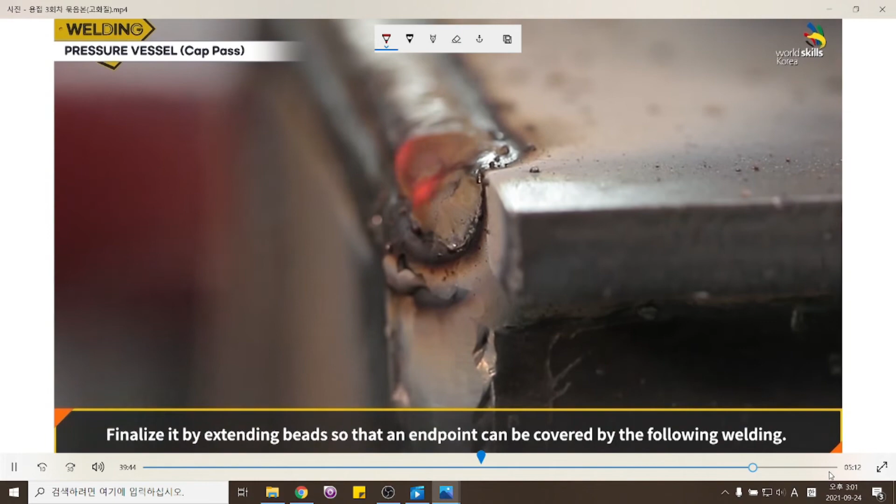Keep your eyes on the tip of the welding electrode, as the electrode would have eccentricity while melting. Finalize it by extending the beads so that the end point can be covered by the following weld. Remove slag with a spot weld hammer. For horizontal welding, welding beads shall have a profile like a knife line.

Fillet welding. Inclined vertical fillet welding, welded with number 136 FCAW process. Deposit welding beads up to the marked line by weaving. Progress welding with the weaving technique without undercut while checking the 10 millimeter fillet guide line at both sides.

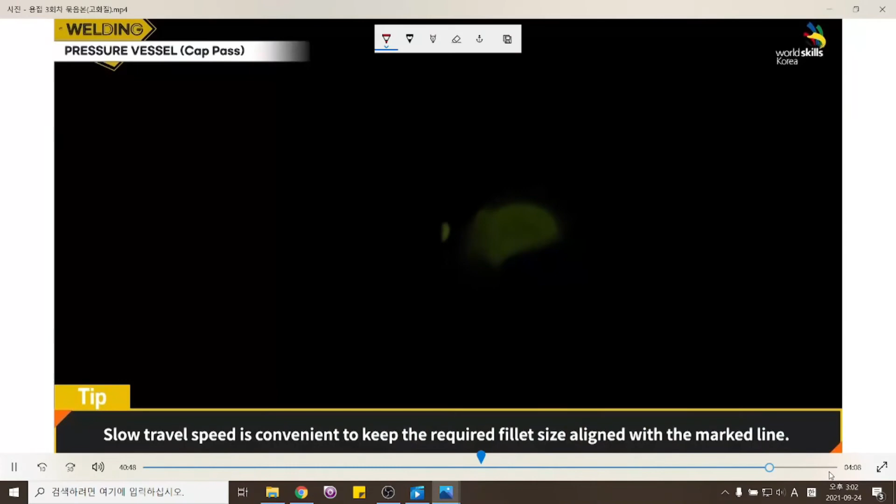For the FCAW fillet welding, a thin root pass is made in order to keep a slow travel speed for the cap pass, unlike the other passes. Slow travel speed is convenient to keep the required fillet size aligned with the marked line. After welding, remove slag with a spot weld hammer.

Pipe joint welding. For pipe joint fillet welding, weld with number 111 SMAW process. Fillet size for pipe joint is 8 millimeters, and it includes all-around welding. The cap pass is piled up a total of 2 times. Weld the first cap pass along the bottom guideline.

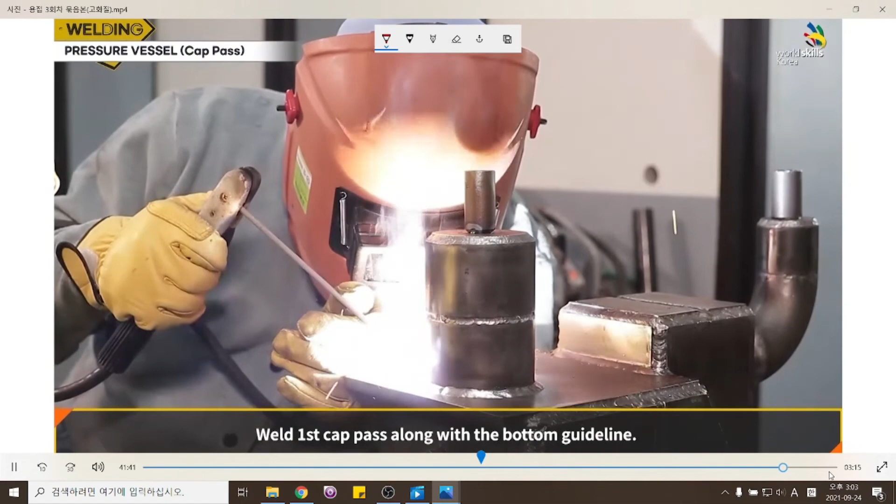Remove slag with a spot weld hammer.

This is the second cap pass of pipe joint welding. For the first cap pass, the electrode work angle moves up and down, starting from the top. For the second cap pass, hold the electrode work angle slightly up from the horizontal level as welding progresses, following the line above the guideline. Weld the second cap pass along the guideline drawn on the pipe. When the size of the keyhole and molten puddle fits the marked guideline, make a stringer bead without weaving.

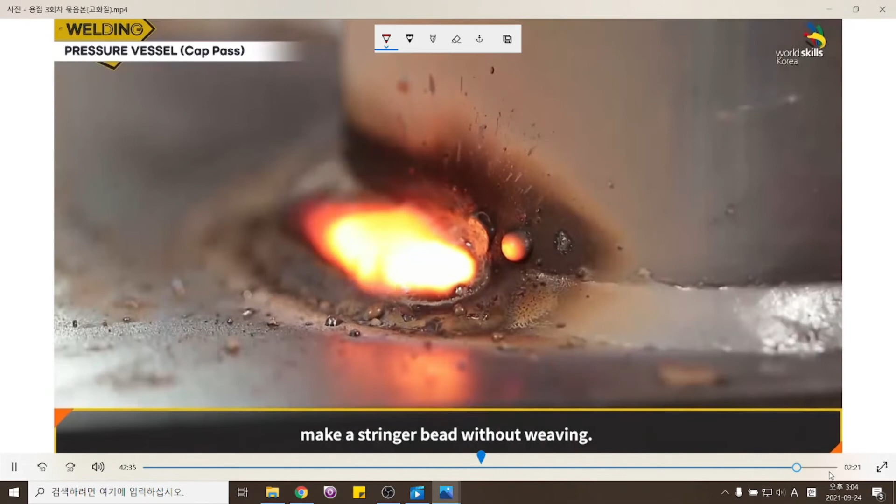Remove slag with a spot weld hammer.

For pipe mild steel corner welding, weld with the number 141 GTAW process. Weld up to the groove edge by weaving. Weave and travel forward in a half-moon or zigzag pattern. Keep the tilting angle of the filler metal to the weld line at 10 to 20 degrees. Make the weld by pushing the torch toward where the arc starts. When the filler metal is fed uniformly, the filler metal will remain on the bead the same as this point.

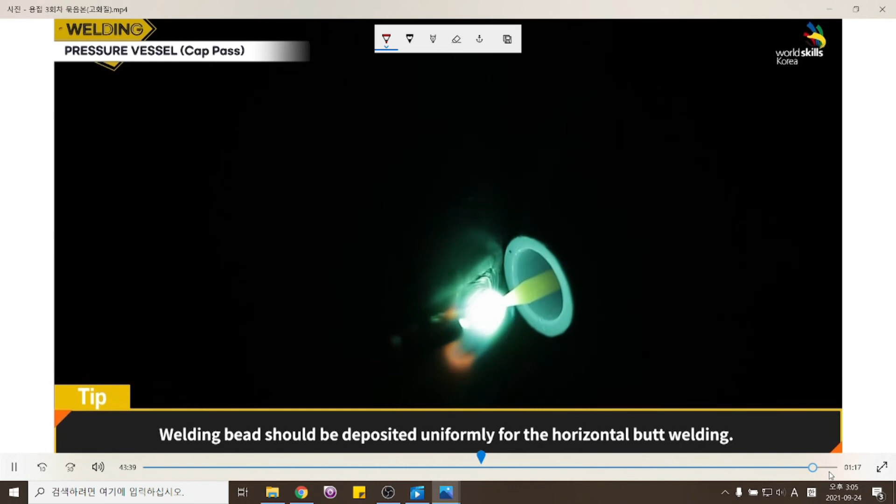Pipe joint butt welding. Weld horizontal butt joints with the number 141 GTAW process. The welding bead should be deposited uniformly for horizontal butt welding. To keep a uniform bead width, the weaving width should be kept uniform. Weave along the pipe radius while keeping a uniform arc length.